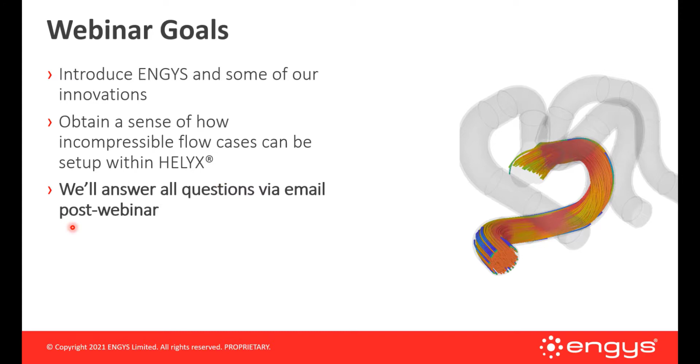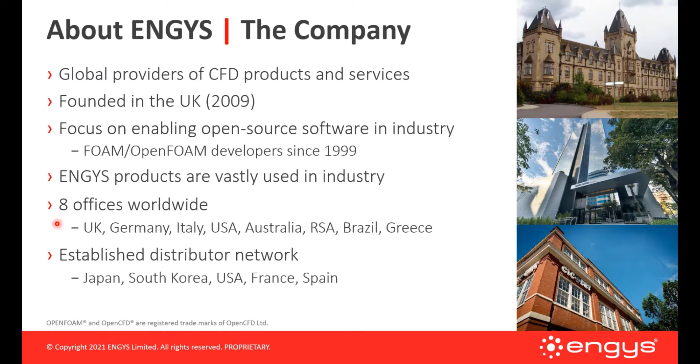In case you don't know ENGYS yet, ENGYS is a global provider of CFD products and services since 2009. We have been FOAM and OpenFOAM developers since 1999, and because of such highly experienced and skilled CFD developers, we have been able to provide incredible CFD innovations to our more than 200 customers around the world. Currently, ENGYS has offices in 8 countries, and we have a well-established distributor and resellers network around the world.

ENGYS was founded with the main focus of providing a CFD software that could join the benefits from both open source technology and a standard commercial software in the market. The main open source benefits for industry in the CFD context are full capacity of customization of the source code and free scalability. And when I say free scalability, I mean that the user can run as many simultaneous simulations and in any number of processors as desired, without having to buy any extra expensive HPC licenses like all other commercial CFD software in the market do.

But the industry also needs efficiency and high productivity, and for that, an easy-to-use graphical user interface, high-quality technical support, and proper documentation are needed. And this was exactly what ENGYS achieved, a CFD software which comprises all those benefits.

This resulted in the current ENGYS products: HELYX, our general-purpose CFD tool for enterprise applications; Elements, an advanced software suite for automotive design, with all HELYX Core and HELYX GUI components plus extra features extremely useful for the automotive industry; and the HELYX add-ons, a set of additional modules for HELYX and Elements for specific applications, like continuous adjoint optimization, block-coupled solver, marine hydrodynamics, and advanced multi-phase flows.

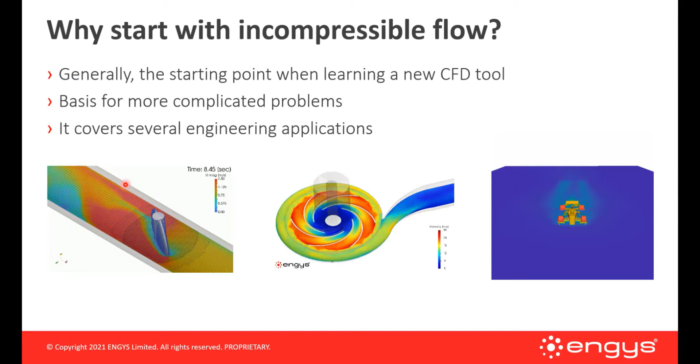So why start with incompressible flows? Generally, these are the starting points when learning any new CFD tool. They are the basis for more complicated problems, even though they can also be quite challenging, and they cover several engineering applications like the ones you see in the videos below.

A few comments regarding the modeling of incompressible flows. Even though these are one of the simplest problems to be solved, don't get me wrong, what I mean is that we can always add complexity, like chemical species, heat transfer in solid and fluid regions, which is conjugate heat transfer, and compressibility of the flow. They are still fairly complex by nature.

In terms of equations being solved, we can talk about a general scalar transport equation, which can represent transport of momentum, mass, turbulence quantities, energy, and so on. And we still are not finished. Once the partial differential equations are chosen, we still need to solve them numerically, and it requires a set of important modeling considerations.

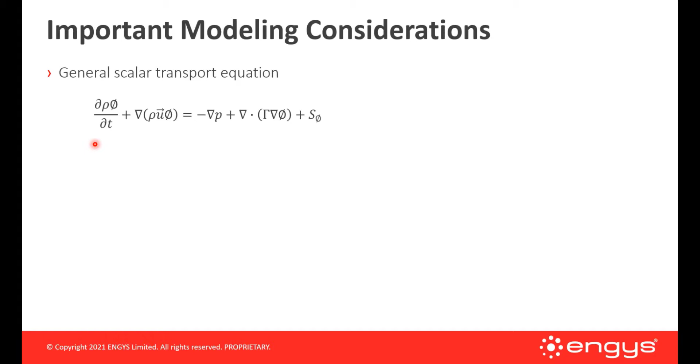Some of them are: first, is our problem in a steady-state regime, or is it completely unsteady? Second, what is the most appropriate turbulence modeling? Is it RANS, LES, DES?

As an example, we can look at the video and pictures on the right of a DrivAer model. At the top you have an SUV type of vehicle whose wake behavior is strongly transient, and for those types of vehicles, modeling turbulence using DES or LES approaches is mandatory to get good convergence and accurate results. On the other hand, sedan type vehicles like the two pictures at the bottom are sometimes well modeled by RANS turbulence models, where you can get good convergence and accuracy because of the weaker unsteadiness behavior of the wake.

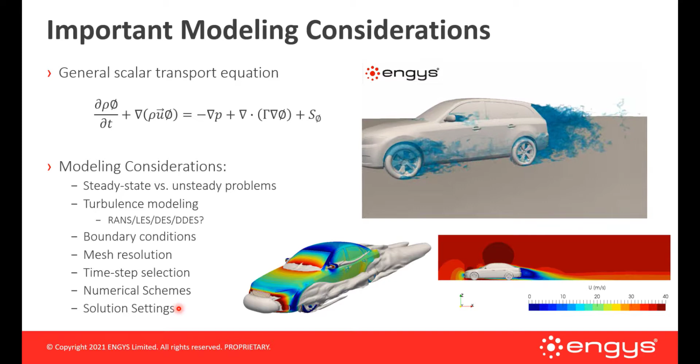Then we need to properly set our boundary conditions, choose our mesh resolution appropriately, select the appropriate time step, robust numerical schemes and solver settings, and the list could continue. So those are some important modeling considerations that we need to take care of when solving an incompressible isothermal flow.

Okay, now let's go to the incompressible flow problem that we're going to solve using HELYX. The problem chosen was a vehicle exhaust manifold selected almost randomly from the GrabCAD website, and I say almost randomly because I really like the shape of this one. This geometry is from user Samu Suojanen, who kindly gave permission for ENGYS to use it, so thank you.

When we are talking about exhaust manifolds, there are lots of things to be considered. For example, if we wanted to consider the real mass flow rate across such exhaust pipes, we would need to consider the volumetric efficiency curve of the engine. We would also need to understand the intake process of the engine, as well as the engine rotation and the cylinder cycles, and everything needed to properly estimate the mass flow rates. However, all of this is of course out of the scope of this webinar.

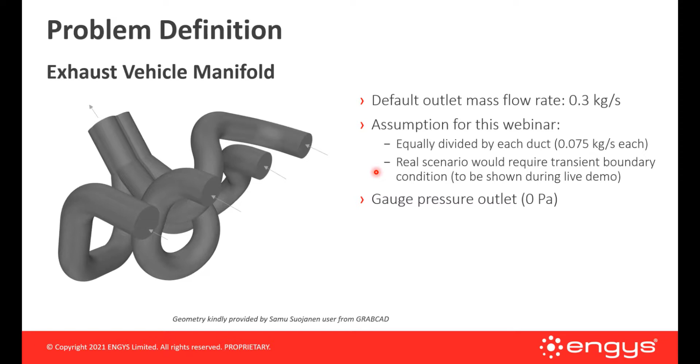In order to demonstrate HELYX capabilities, we will simply use a fixed mass flow rate in each of the pipes. I will also show quickly how the user could create a time varying table for the inlets of the pipes to represent the cylinder cycles in a transient simulation.

As expected, there are lots of things to evaluate in the results: pressure drop across the pipes, turbulence source for acoustic noise, velocity profiles and flow patterns, trying to find areas for optimization, and so on.

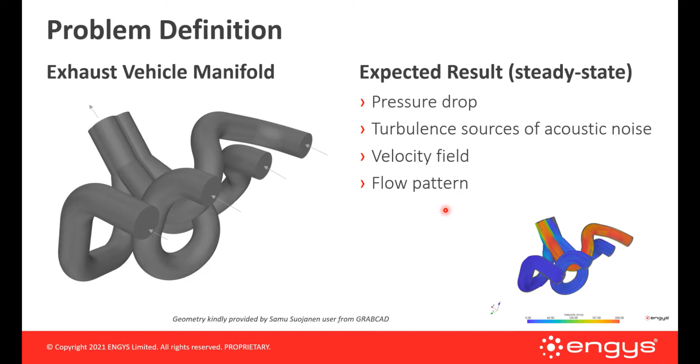So let's go to the live demonstration of HELYX for this problem.

Before we start, I'd like to say I'm not going into all the details of our graphical user interface because I need to stick with the 20 minute webinar. However, we will cover most of the features in the list of webinars that ENGYS is going to provide in the next weeks. So the first thing we need to choose when opening HELYX is the type of client-server connection that we want. In my case, I have both client and server on my local machine, so I'm going to select localhost. However, we have other options as well.

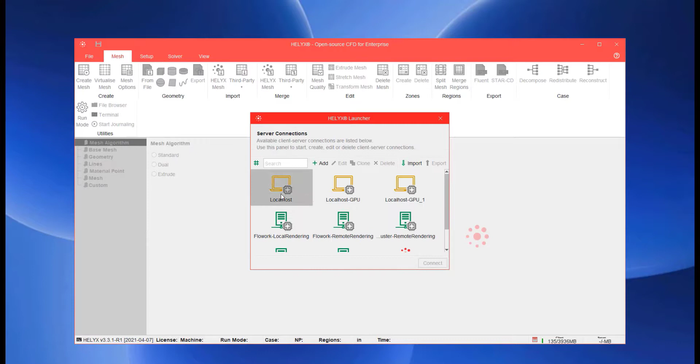Let's create a new case. And always remember that we don't have any license limitations on the number of processors. Let's select 12 for this case.

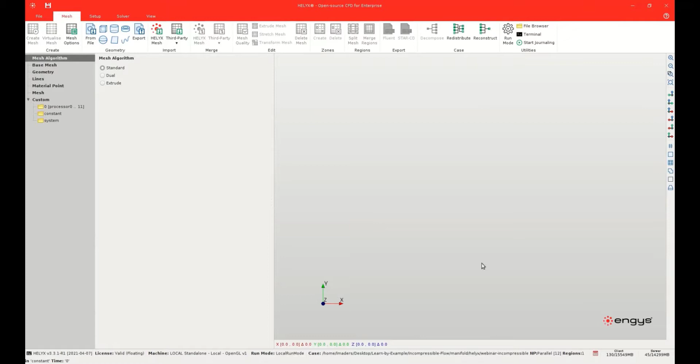The first thing we need to do is import our geometry. This particular geometry is in STL format, but we have other options as well. Also, this geometry is in millimeters, so I'm going to check this box in order to import the geometry in the correct scale.

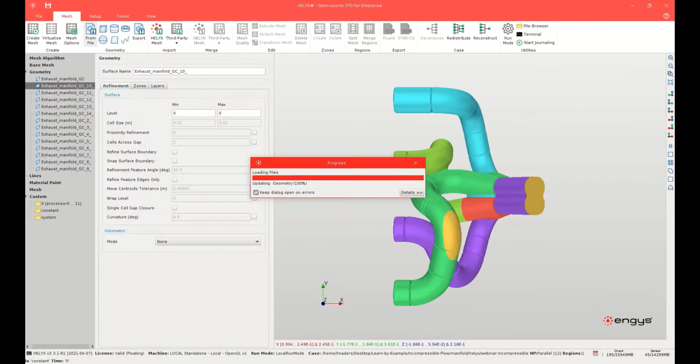Once our geometry is imported, we can start to manipulate the surfaces. When I say manipulate the surfaces, I mean splitting it into more than one surface, or transforming it, like translating, rotating, or scaling it. Or if I select more than one surface, I can join them into a group, and after they are joined, I can fuse them, for example. So let's do some of those to demonstrate it.

I'm going to select those three parts, join them into a group, and then fuse them. Now all of them are in the same surface.

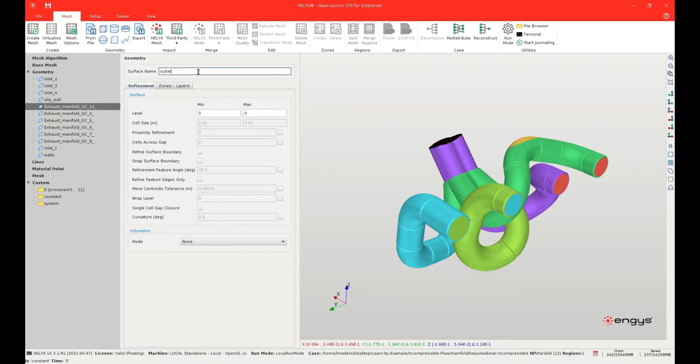Now let me rename the surfaces, and I'm going to put all the walls of the ducts into the same patch as well.

Now that we have our geometry ready, we can start meshing it. The first thing we need to do is select the mesh algorithm. I'm not going into the details because we will have a dedicated webinar for meshing. For this webinar, let's choose the standard mesh algorithm.

Next, we need to select the base mesh size. The base mesh size is basically the maximum volume cell size that we want in our mesh. All surface and volume refinements are going to be relative to this size. For this case, let's select 5 millimeters.

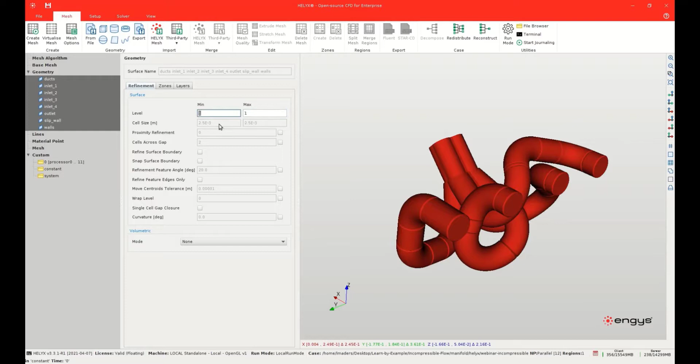Now I'm going to apply to all my surfaces a surface refinement level of 1. That means 2.5 millimeters, which is half of the base mesh size. Then I'm going to select my walls, go to the Layers tab, and apply 3 layers with a growth ratio of 1.1. We also have other options for boundary layer control.

For the inlet and outlet surfaces, I want the layers to be projected onto those surfaces. So I'm going to the Layers Projection option and select Enable.

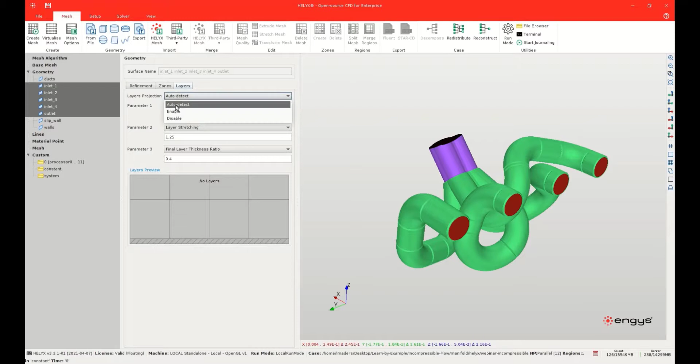Lastly, we need to select the material point location. For internal flows, the material point location should be inside our geometry.

Now we can create our mesh. While the mesh is being generated, it generates a log which contains some important information about the mesh generation.

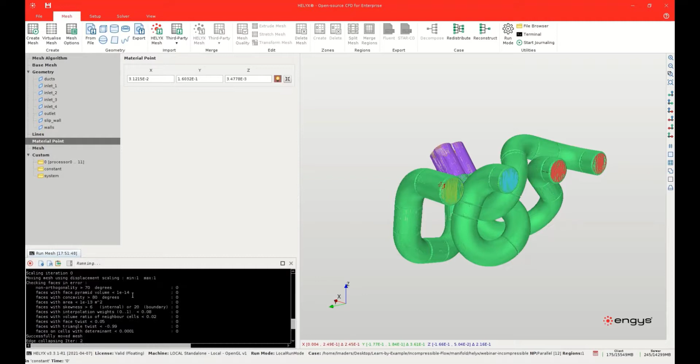Once our mesh is ready, we can visualize it in the View tab. We can see the surface mesh, and also we can see the 3 layers being projected onto the surfaces.

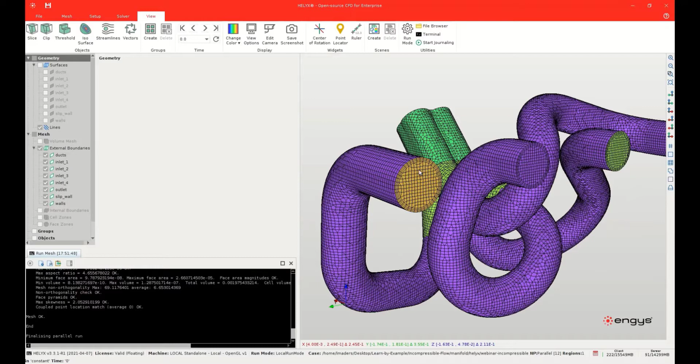If we want to see the volume mesh, we can make a slice. So we go to Slice, select Volume Mesh as source, select a plane, and click Apply.

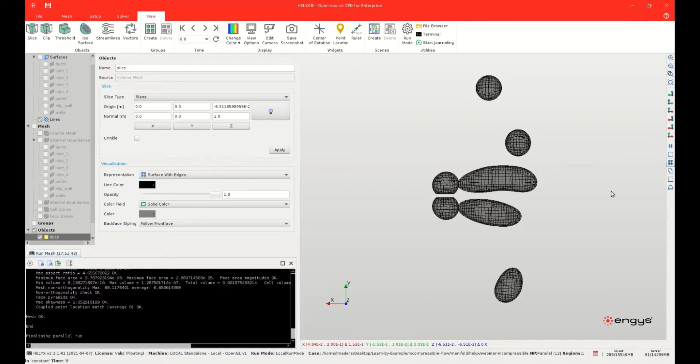Now let's go back to the previous visualization. And since our mesh is ready, let's go to the Setup tab.

In the Setup tab, the first thing we need to do is select the options in the Solution section, which is the type of solver that we want, segregated or coupled solver. And always remember that the coupled solver is available for all customers that have acquired the HELYX coupled add-on module. If we want a steady state regime or a transient simulation, incompressible or compressible flow, if we want to solve the energy equation or not.

For multiphase flows, we have different models available, and you can notice some of them are grayed out. That's because those are transient models. If we select transient, they become available, and there are other options as well.

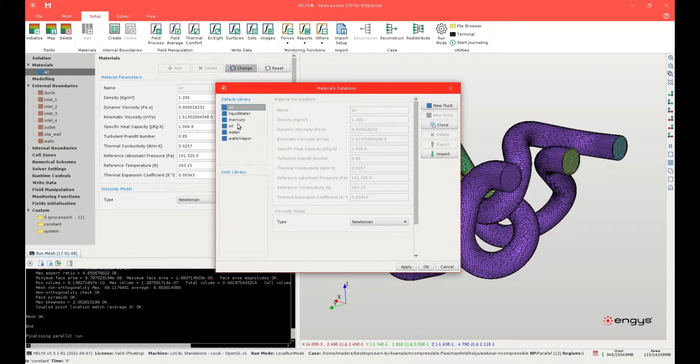Now let's go to the Material section. Here we can define our material properties. We can create new materials, clone the existing ones, or import our own materials. Also, we have some non-Newtonian models to choose.

In the Modeling tab, we can choose things like the turbulence model, buoyancy and radiation if we were solving the energy equation, and other options depending on the type of simulation we are going to solve.

Here we have a few options for turbulence models to choose. Let's select the standard K-epsilon model.

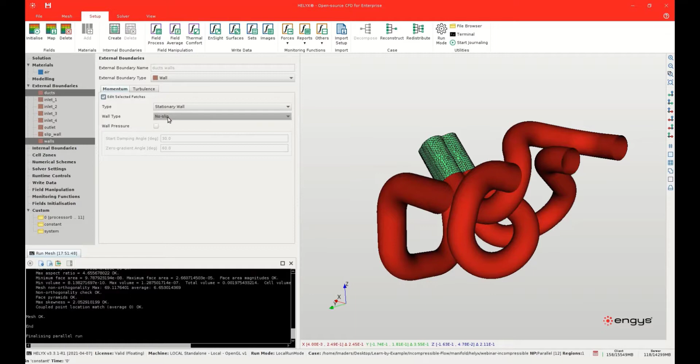Now let's go to the boundary conditions. For those two walls, we want a no-slip type boundary condition. For this particular one, let's select a slip type boundary condition.

This was an extension that I created in order to put the outlet boundary condition a bit far from the domain of interest.

For inlet number 1, let's select an inlet type boundary condition. We have a few different options: velocity, flow rate, and pressure. Let's select flow rate in this case.

Here you can see we can apply a constant value or a time varying boundary condition, as I mentioned in the presentation. In this option, you can enter a table with different values of flow rate for each iteration.

However, for our case, let's select a constant value. Also, we want to apply mass flow rate. For mass flow rate, we need to provide the density of our fluid.

For the turbulence quantities, we have several options as well. For the other inlets, let's apply an opening type boundary condition, which is basically a total pressure boundary condition.

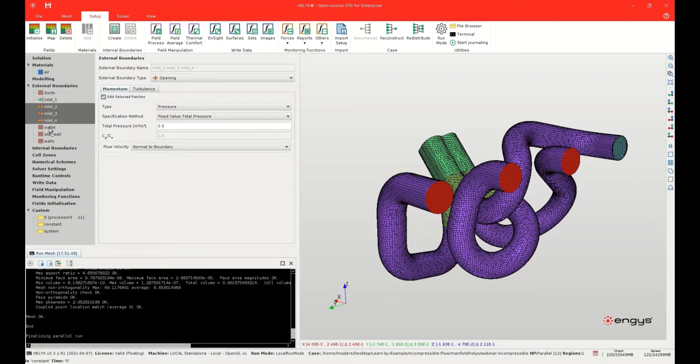For the outlet, let's apply an outlet type boundary condition. Let's select pressure, and let's select a fixed static pressure value. Since we are dealing with an incompressible flow, this value is relative, so let's leave it at 0.

Now let's go to the numerical schemes. Here we can change things like the gradient schemes, advection schemes, flux limiters, and things like this. In the solver settings, we can change the residual control, relaxation factors, and things like this.

Always remember that those two options are automatically selected by the GUI, based on the options the user selected in the solution section.

In the runtime control section, we need to select the number of iterations we want to solve. For this case, let's select 300, so it runs fast for the webinar.

Here, let's select the frequency that we want the GUI to write the fields into the disk. Let's simply write at the end of the run.

In the field manipulation section, we can select several different post-processing utilities. If we select field process and click on the plus button...

...you will see the list of available post-processing utilities that we have. Let's select, for example, skin friction.

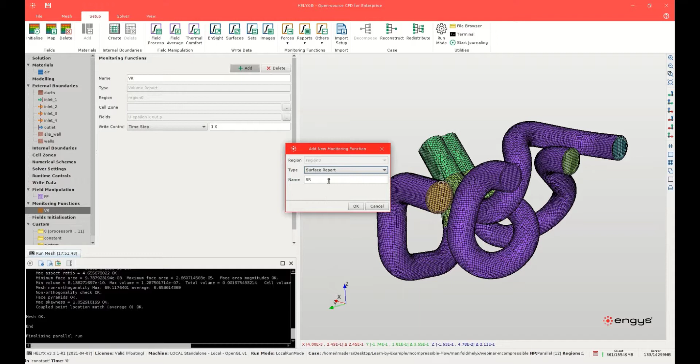We can also choose surface reports, which does the same thing as the volume report, but for a selected surface. So let's do this for inlet number 1.

And let's select pressure. In this way, we can monitor the pressure values and calculate the pressure drop across duct number 1.

Now we can initialize our flow. For velocity and pressure, let's use a potential flow solution.

For the turbulence quantities, let's use a mixing length approximation. Now we click the Initialize button.

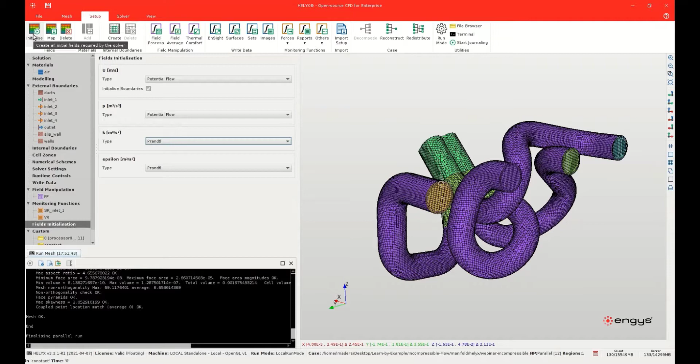Once the fields are initialized, we can take a look in the View tab. Now we can go to the Solver tab...

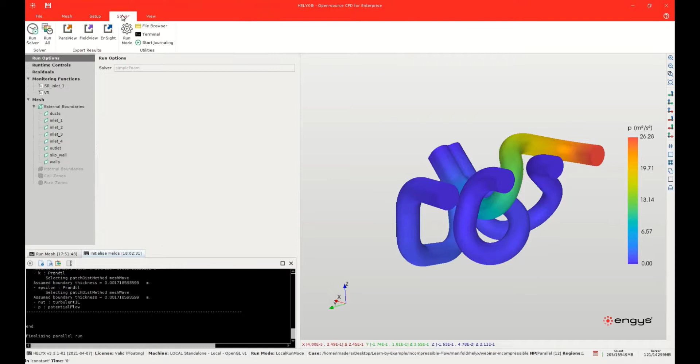...and click Run Solver. While the solver is running, you can check the residuals through this graph. Also, you can check the surface report and volume report values as well.

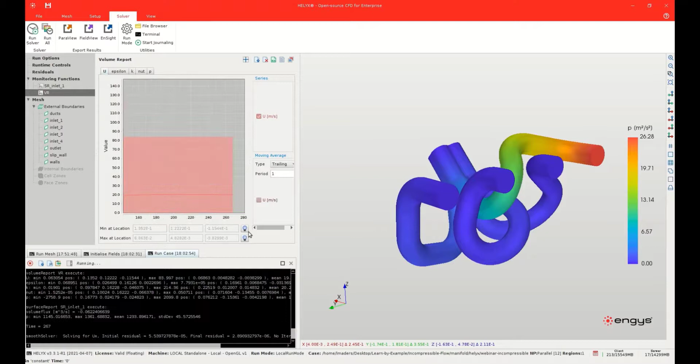Now the case has run, let's go to the View tab for post-processing. The first thing we can do is go to the last time step.

Now it's very useful to create groups to better organize our post-processing.

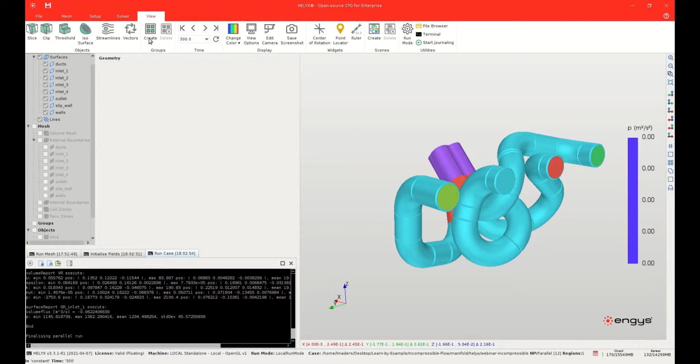We can change the view options as we want. Let's create some streamlines.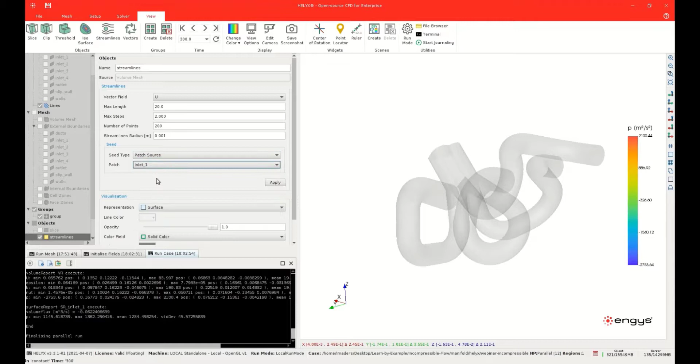Let's select the source of the streamlines to be the volume mesh. Let's choose the seed source to be the patch inlet number 1. And also, let's color the streamlines through the velocity magnitude.

We can change the legend as we want as well. Once we are satisfied with the image, we can create scenes for later visualization.

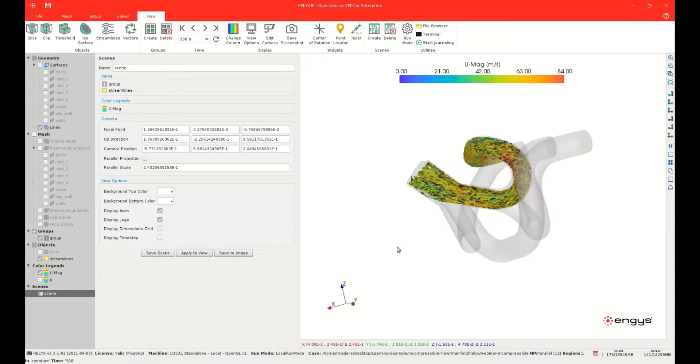When a scene is created, I can move around. I can change anything I want. And when I click Apply to View, that scene is recovered.

So, that was a quick demonstration of an incompressible flow using HELYX. Let me go back to the slides.

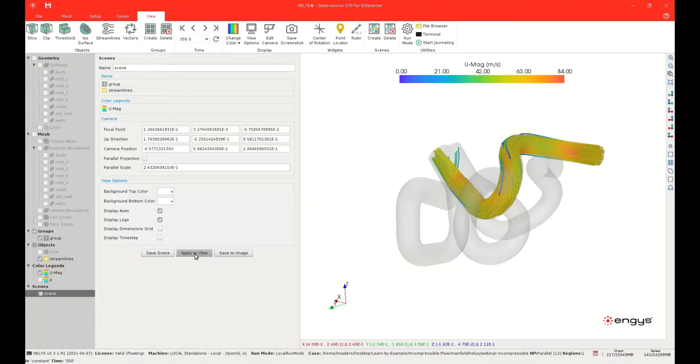So, a few take-home messages before we finish. We wanted to demonstrate with this webinar some of HELYX's capabilities that rival other CFD commercial codes.

HELYX is vastly used in the industry and has already replaced several other CFD commercial codes.

Also, HELYX has an end-to-end solution for incompressible flows that includes meshing, setup, solve, and post-processing, all embedded into our graphical user interface. And the best thing is that HELYX makes use of all open source benefits.